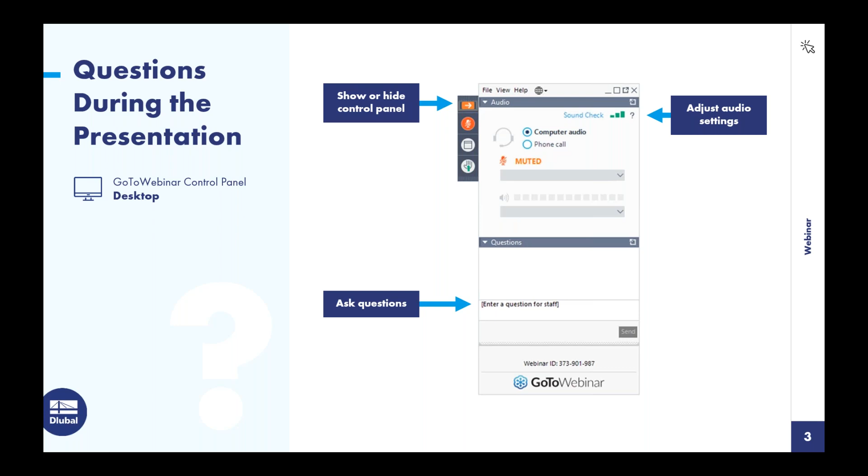We'll then move on to our second example, a CLT hybrid multi-story building. This is where we can address both lateral and gravity analysis and design. We'll take advantage of the building model add-on, which releases these building specific features within RFEM, including diaphragm and shear walls, and of course we can still carry out the full design of our CLT panels according to the CSA standard.

For those of you not familiar with our program, RFEM 6 is the base software, so this allows us to fully model our structure. All of the materials, the cross sections from the available standards are included in the base program, not only for Canada and the United States, but also other international standards. We can fully load the structure and get an analysis, so internal forces, deflections, and so on.

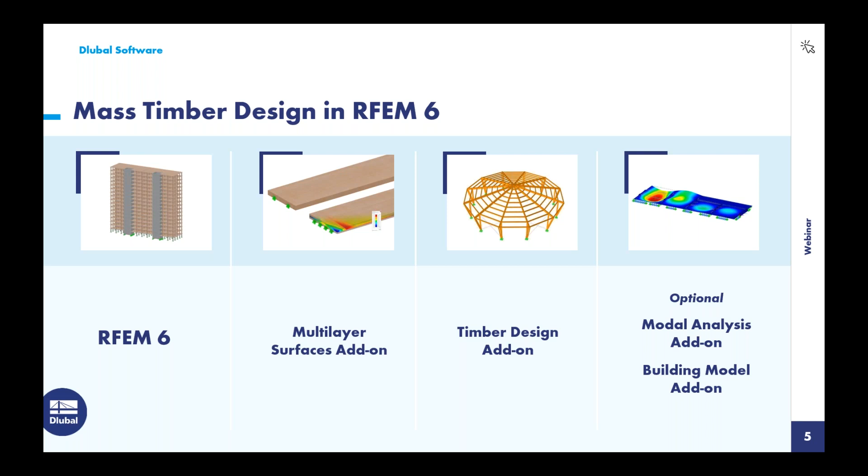We'll begin in RFEM today where, when you begin a new model, the base data dialog box is available to us, so we would give it a model name. For my timber floor, we could technically model this in a 2D environment since we're looking at gravity only, but I will keep this in a 3D environment. Under the second tab for the add-ons, these are the available add-ons within RFEM that you have purchased for your license, and for today's example, we're going to activate here the multi-layer surfaces as well as the timber design add-on.

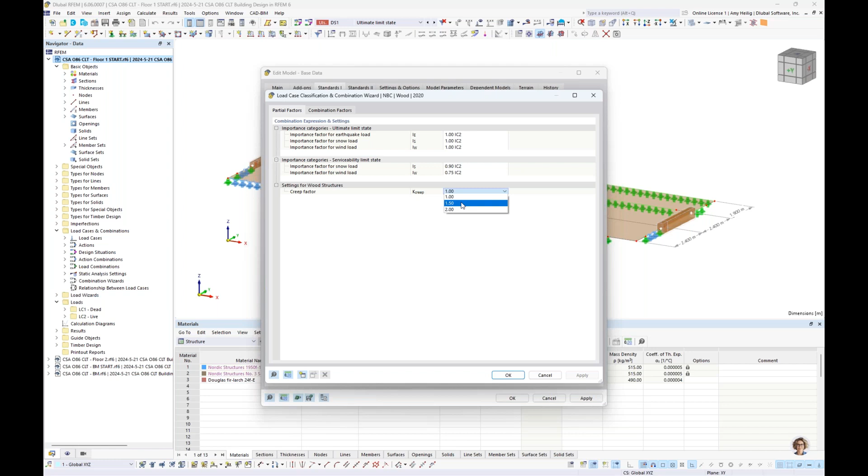Finally, under this third tab, this is where we set our standards. You'll notice within this dropdown I do have the NBC selected, specific to wood. This is identical to the NBC load combination generator above it. The difference is that when we activate the timber design add-on, we have the ability to account for the creep factor. I'll show this to you later on in the serviceability load combinations, how we can account for that, but the NBC wood is required when we activate the timber design add-on specifically.

We will carry out the design of the CLT panels according to the CSA O86 2019, but notice we also have the NDS, Eurocode, and other international standards available. I will be working in metric units today, but we can always change this to imperial units. If we access the unit settings here, we can toggle between metric or imperial.

I already have the timber floor modeled, but let us run through the workflow we would typically go through when modeling a new CLT panel. We would start by drawing a 2D surface element, available up here in our toolbar. The program is asking us to initially define a thickness.

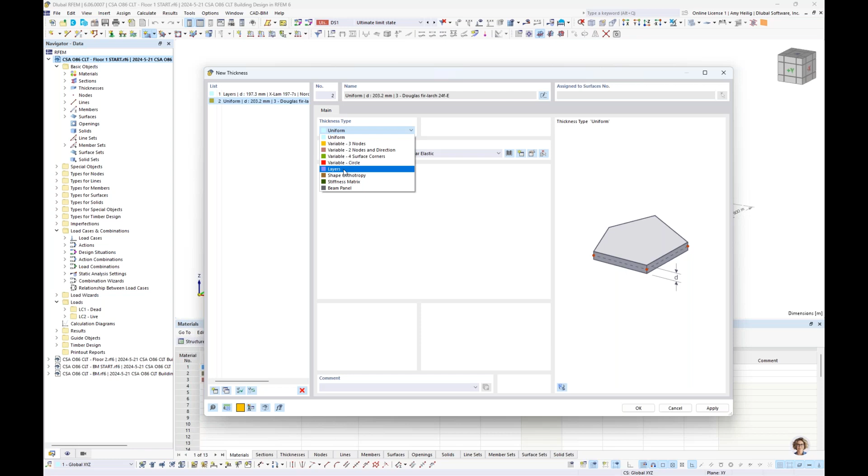If I go into my thickness definitions, we would create a new definition type here. Notice that the thickness type can be set to layers. This option is only available because we have activated the multi-layer surfaces add-on. Without this add-on active, we would not see this option available to us.

Under the second tab, this allows me to individually create my layers for my custom CLT layup. To begin, we want to define a new material. We can access our material database with the button in the upper right-hand corner, and using our filters on the left, we can filter to Canada, to timber, and then the CSA O86-19. Here are all of the relevant materials with the sub-materials shown on the right-hand side. Once we select any arbitrary material for our example today, we click OK.

It would be quite common for CLT to change the material model to orthotropic. This is required because we're using this material for 2D surfaces, so we need two different strengths in two different directions. We'll go ahead and toggle that to orthotropic linear elastic.

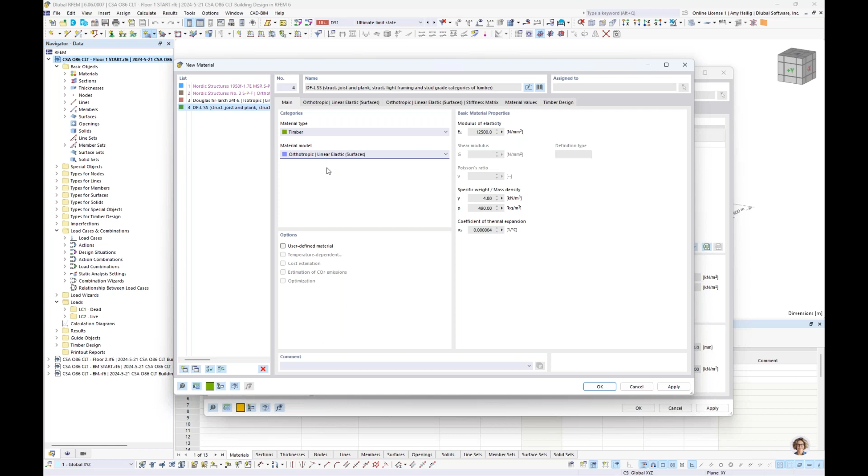We would also want to activate user-defined material. And it's quite common with CLT to set the modulus of elasticity in the weak axis direction to 0.

Once we have input this information for the material, it will be brought into the thickness dialog box where we can set the thickness of our first layer to something like 40 millimeters. The orientation is set to 0 degrees, based on the local x-axis of the surface element itself.

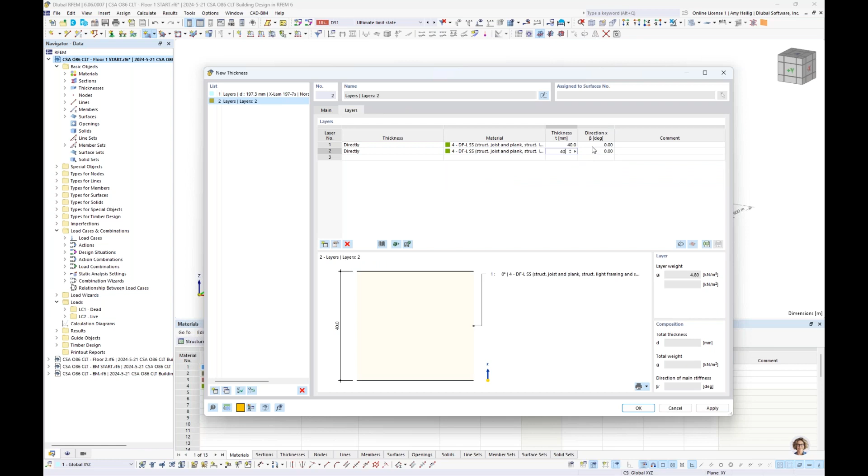For the second layer, we can choose this same material and set the same thickness, but the orientation would be set to 90 degrees. For our third layer, we'll again use the same material, 40 millimeters. And here we have a custom 3-layer CLT layup.

This is the entire concept of CLT: to ensure that these layers are oriented 90 degrees from the layer above or below it. We can save this to our library so that we can pull open this layup definition for any future RFEM models. Alternatively, if we want to take advantage of our manufacturer library, we can do so.

Under import layers from library, after clearing the filters of the regions, we have all of the manufacturers from North America and Europe implemented directly within RFEM. Filtering to the region of Canada, we have a few manufacturers here, including KLH, Kalesnikoff, and Nordic Structures. Today we'll take advantage of Nordic Structures and choose a 7-ply layup.

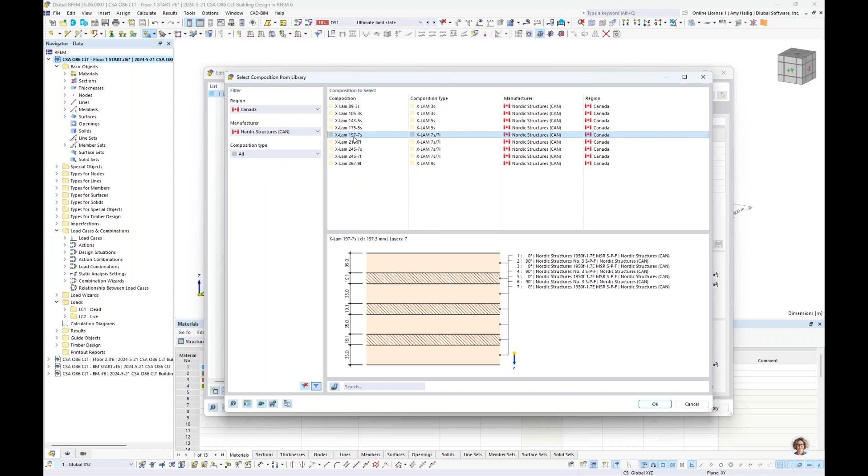When I click OK, you'll notice that all of these layers are automatically brought in with the relevant thickness and orientation, and this is just information given to us directly from the manufacturer. So quick access here if you do plan on using one of their products.

Under the third tab, stiffness reduction - this is a really important topic when it comes to our CLT panels. Notice that the K33 reduction factor here is for the torsional stiffness. We also have the K88, which is the in-plane stiffness reduction factor. These values were already given to us by the manufacturer.

It's quite common for most of these CLT manufacturers to not include glue at the narrow edges of the boards of each layer, so inevitably the shear stresses are also not going to be transferred to those narrow sides of the board. This is the reason why we typically would want to apply these reduction factors to our panel.

When we reference the CSA or the NDS, there really is no guidance on how to calculate these stiffness modification factors. So we actually refer to the EC5, and in particular the Austrian Annex, which has very clear equations on what these reduction factors should be when we do not have glue at the narrow edges.

I'll turn to our website, dlubal.com, where we have a frequently asked question, FAQ 4119, that discusses this topic further and exactly how to calculate the K33 and K88 reduction factor from the EC5 standard. We also have an Excel file you can directly download from the FAQ. If I pull open this Excel file, it's fairly straightforward—we just input some properties of our CLT panel, and the equations from the Austrian annex are already listed here to calculate exactly what those reduction factors will be.

So again, going back to RFEM, when you are taking advantage of manufacturer CLT products, these values have already been set and given to us from the manufacturer directly. But if you are creating a custom CLT layup, this is likely something that you're going to want to input yourself.

Now, K44 and K55 are the shear stiffness reduction factors. When we take a look at the CSA O86 or the Canadian CLT handbook for deflection calculations, these all utilize the shear analogy method to calculate the reduced bending and shear stiffness to account for shear deformation. RFEM is actually utilizing what we call the laminate theory, and it directly calculates the shear stiffness matrix entries D44 and D55, considering both shear and bending deformation. So the laminate theory is certainly a more detailed and exact approach compared to the analytical equations from the shear analogy method. That reduction is all taking place underneath the hood with the laminate theory calculations, so we likely are not going to adjust these factors.

Then we have our settings down here where we can activate this checkbox for design for failure of net section and failure in glued contact surface. So we might be wondering, well, what is this related to?

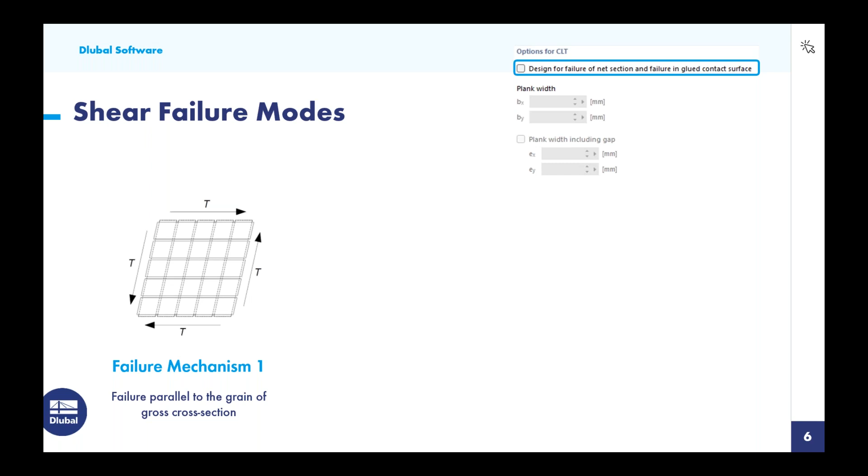Now, when we turn on this option, we're going to carry out 2 additional checks, including failure mechanism 2, which is failure perpendicular to the grain of the net cross section. This is also known in the handbook as the net shear failure.

And finally, we also have failure mechanism 3. This is the failure of orthogonally crossing boards, otherwise known as torsion.

So we might apply these additional shear checks when we have a CLT panel that's acting more like a beam, or certainly for wall elements. You'd want to refer to the handbook to decide if that's something you'd like to activate for those additional checks of the CLT panel.

The plank width would also be defined when we turn on this option, as well as a plank width including any gaps if those were available. This information would be needed to carry out these additional shear checks.

For today's example, I'm going to leave this unchecked, so we should only see failure mechanism 1 in our results.

The final tab here is going to be the stiffness matrix. This is the entire concept of these multi-layer surfaces—we are calculating this global stiffness matrix automatically for you based on the individual layers, and we can actually view the stiffness matrix here. I'll discuss this in more detail later on when we're running our calculation.

Once this information is input, we would draw our CLT panels. You'll notice that I've taken the liberty here to model 3 panels side by side for our timber floor. Now, it's really important, in the same way that we orient members with a strong and a weak axis, that we do the exact same thing for these timber panels. So CLT panels also have a strong and a weak axis, and we want to ensure we are modeling them correctly.

So under our navigator and the views tab, up at the top, we have our surfaces tree, where we can activate the display of the layer directions. I'll turn this into wireframe view and zoom in here. Now you'll notice that layers 1, 3, 5, and 7 for our CLT panel, which is the strong axis direction, are oriented in the lengthwise direction between supports, which is exactly what we'd like to see.

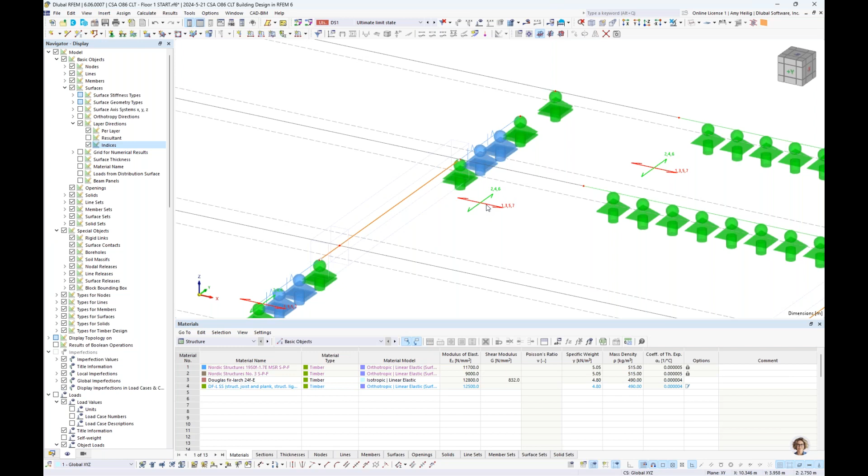And then those are the weak axis, so layers 2, 4, and 6 are oriented in this transverse direction. Alternatively, we can activate here only the resultant, which is going to show you the strong axis orientation only.

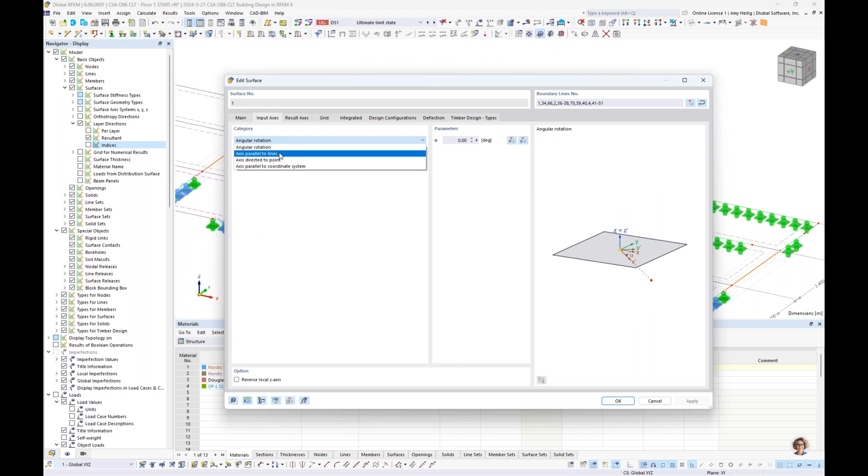If we needed to make modifications to the axis direction, we could double click on a surface or multiple surfaces, activate specific axes, and under the second tab, we have the ability to rotate the local axes or set them parallel to a line within the model, among other options.

So I'd also like to go over the additional elements that are modeled here for my timber floor. You'll notice that we do have glulam beams that are going to span between these supports and support the CLT panels above them.

Now, I did not model an eccentricity here. Everything is modeled at the center line. This is a bit more conservative approach with the internal forces rather than modeling this fully rigid eccentricity, which may be hard to achieve in true construction methods anyway.

So taking a look at the cross-section definitions quickly, we have our first beam over here, a slightly larger section at 240 by 440 millimeters, and then the rest of the beams are going to be 160 by 320 millimeters.

All of these members have a moment release applied at the member ends, as well as a torsional release applied at one end only. Now, these were modeled as separate segments here. It is entirely possible to keep it as one continuous member, but if they are separate segments, it's really no problem in the program. We can select both of these and create what we call a member set.

So that's what this very faint dotted line is around both of these segments. And member sets can be fully designed as one continuous member as well, regardless if the beam is broken up into separate segments. Now, we won't be looking at the member design today, rather our focus is only on the CLT design, but I thought that was worth mentioning.

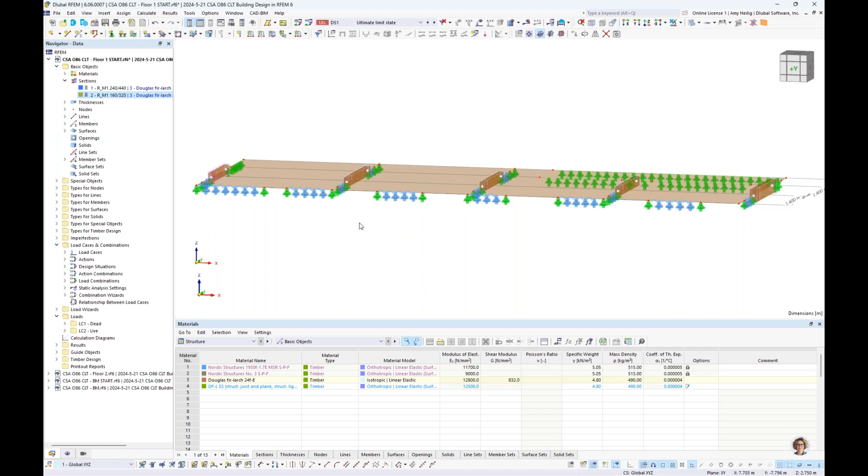You'll also see here several support conditions, and essentially this is a timber floor that is modeled at the elevation 2.75 meters in the vertical direction. So these support conditions are going to represent the columns and the wall elements that are framing up underneath it. But because we're only evaluating and analyzing the specific floor for gravity only, we're representing those by the support conditions shown.

So for example, we have pin supports here and over on the right that maybe represent the column framing up into the timber floor directly for point supported CLT. Then we also have the pin line supports that are going to represent our concrete shear walls. And then you'll also notice these nonlinear line supports, which are representing our CLT shear walls that maybe exist framing up into this timber floor.

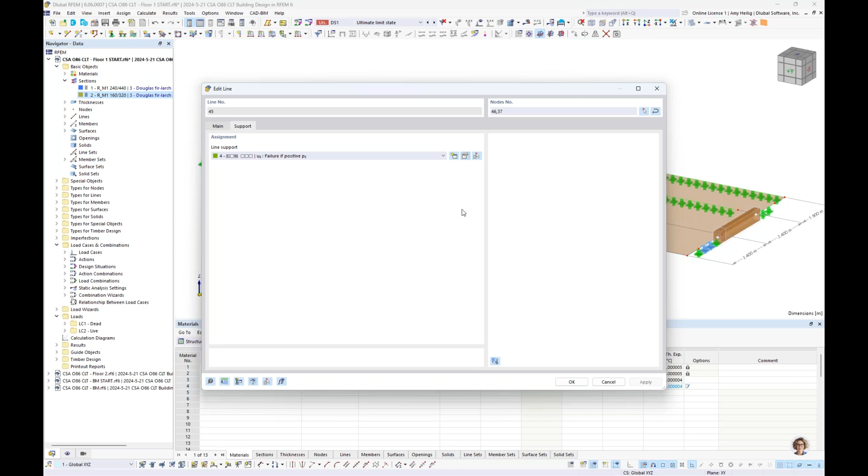So I have set this nonlinearity here so that these two elements will release in tension. When that occurs, we also have the nodal supports modeled at each end of that CLT shear wall. This represents some type of tie or strap to take those tension forces over.

So the modeling overview is complete, but now let us talk about how everything is connecting together. And specifically, we'll start with the timber panel to panel connection here. So as it's shown as default, all of the member forces, the CLT panel forces and moments, are going to be fully transferred to one another.

But we know that these panels will likely be connected with screws. So we would like to release something like the moment. Maybe we want to account for the slip of the screw connection. Well, we do so with what's called a line hinge.

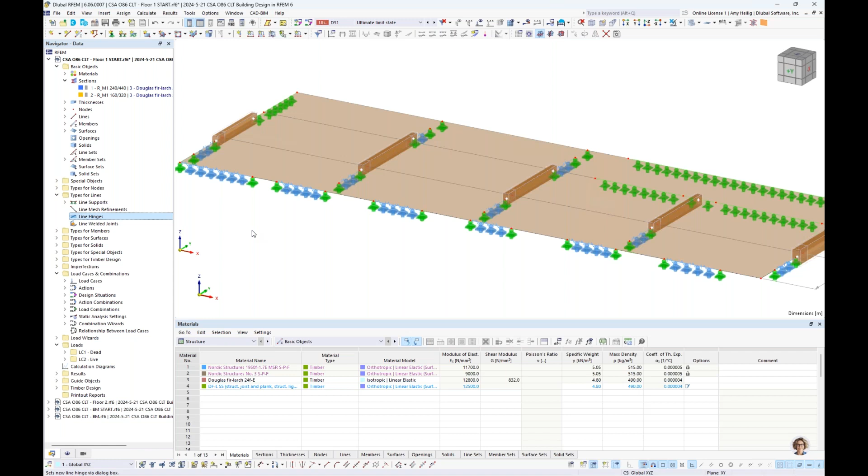And this is available over here in our navigator. Under the Types for Line folder, we can right-click here under Line Hinge to create a new definition type. And within this dialog box, we can fully release the moment between the two panels.

Now, for my example today, I'm actually going to just set this to a very small value. I get a little bit better stability once we get into the larger 3D model. So it's entirely possible to release it for most scenarios, but in others, you may need to just set a very small spring constant here.

We also can define the slip of the connection, and this is based on the local axes of the line element itself. So in this longitudinal direction, the local x-axis, we can define a spring constant here, and this would be calculated outside of RFEM just depending on the type of screw connection we have.

Using an arbitrary value here of 8,000 kilonewtons per meter squared, we can set this in both the transverse direction and also the longitudinal direction. We see both the X and Y axes indicated here in our image, and that's what we're setting for this slip over here on the left-hand side.

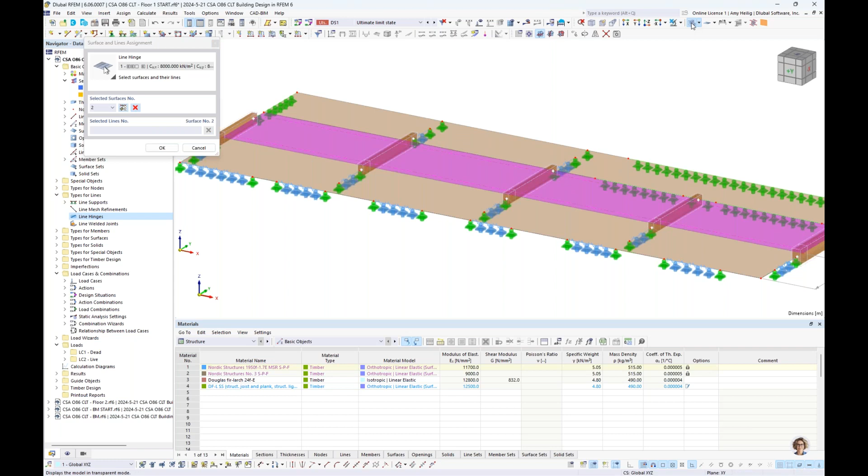Once we have defined this specific definition type, we need to actually apply it to the model. We can do so by initially clicking on our surface, and then my second click is going to be the line elements themselves that I want to apply this line hinge to. When I complete the first surface, we'll choose the option to add a new object where we select surface number 2, and I'll turn this to wireframe view. My second click will be these line elements on the right-hand side of surface number 2 to apply the line hinge. Once this is done, I click OK through these dialog boxes.

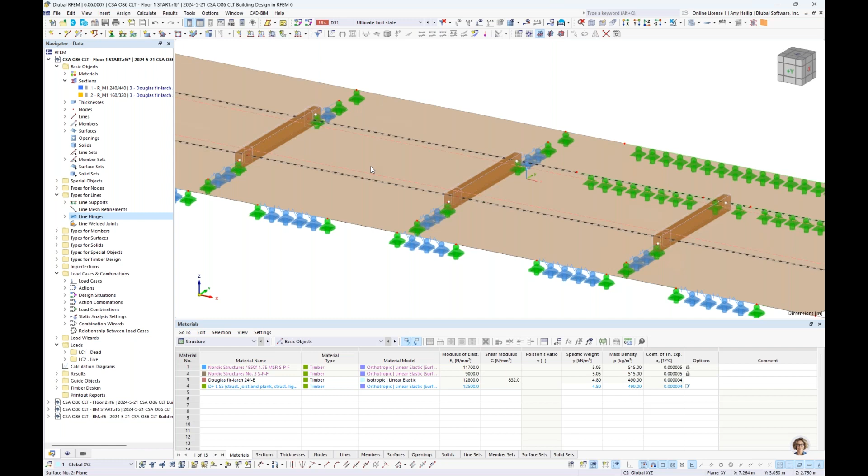If I turn this into a rendered view we should see the line hinge symbol. You'll also notice that I applied this to only one side of the CLT panel. We do not apply a line hinge to both sides — this can cause instability issues within the model itself. We need to leave at least one CLT panel fully fixed. This is the same concept for 3 CLT panels framing into the same line: we can release 2 of them, but we need to leave at least one as fully fixed.

Now we have this same topic of conversation for how the timber members are connected to the CLT panel. Currently, everything is rigidly connected, but we want to account for likely this screw connection. So instead of a line hinge, we're going to apply what we call a line release, available under the special objects tree — we see here line releases. So panel-to-panel connections use line hinges; panel-to-member connections use line releases.

We create a new definition type, and to begin, we select here the degree of freedom definition. This should look very similar to line hinges in that we can release the moment or set a very small spring constant. We can also account for the slip here between the member and the CLT panel. This may be a different value, such as 5,000 kilonewtons per meter squared, depending on our connection, and perhaps I only want to apply the slip in the longitudinal direction here along the line length.

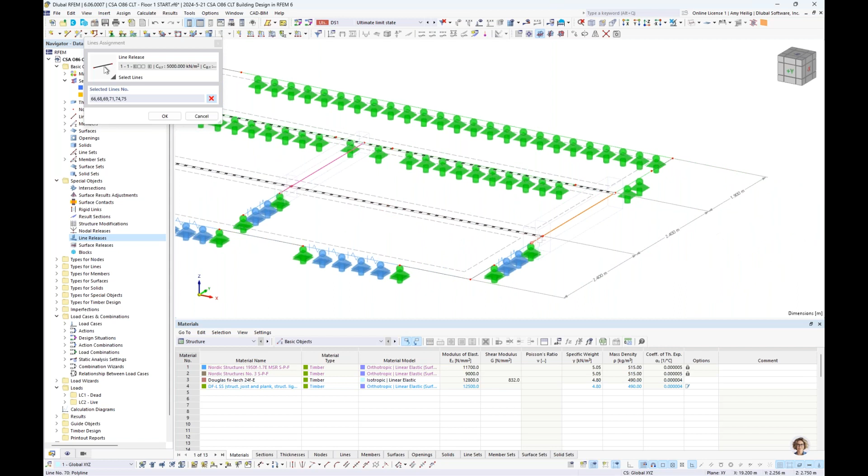When I click OK, I'd like to select here my first 2 surfaces because I would like to release my beams from those initial 2 surfaces. Then I can graphically select my line elements, so I'll scroll in here to select the lines of my first beam. I'm going to purposely skip my second beam, and I'll go ahead and apply this to the additional beam line elements shown in the rest of the model. Once this is complete, we click OK.

The program says, hey, wait a minute — in order to correctly apply this line release, we need to apply either action 1 or action 2. We'll go ahead and apply action 1, and then we get the line release symbol shown around those members.

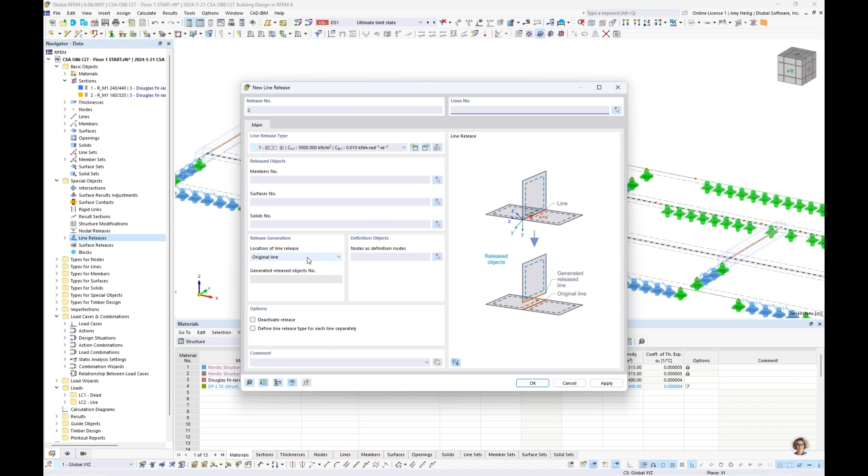Now for this second beam, we're going to right click to create a new line release again, but this time we're going to release surfaces 1 through 3. We're using the same definition type, and then I can graphically select these 3 lines. You'll notice this is different because this beam spans across all 3 CLT panels, whereas the other beams only span across surfaces 1 and 2. So our line releases are now complete.

I did want to point out a new feature here under rigid links that can also take the place of this line release. We've recently added the ability to add in a rigid link for a line-to-line connection, something similar to a beam to CLT panel. You'll notice that the line hinge definition type is already available within this dropdown, so this is an alternate method. If you prefer this over the line release, you can go ahead and take a look at that new feature as well.

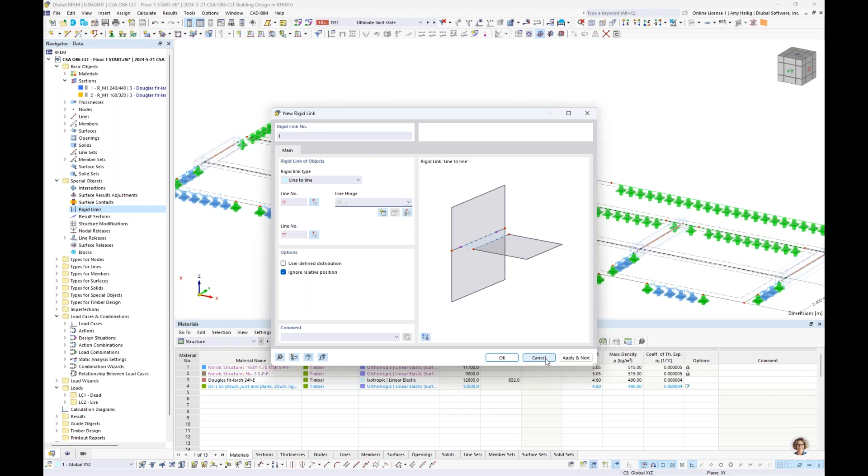All right, so now the modeling is complete. Let us review our loading. For this example, we have a very simple loading scenario — gravity loads only. We have here our dead load, which includes self-weight only, no additional loads applied. We also have a live load of 2 kilonewtons per meter squared, just basic surface loads applied to the 3 CLT panels. In reality, of course, we would have much more complex loading and many more load cases, but for today this will be sufficient.

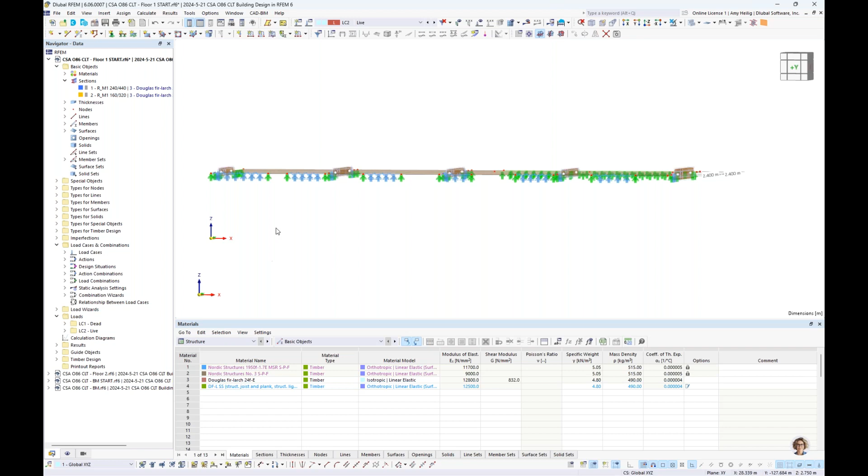Now, for these two load cases and for this model in general, remember we're at an elevation of 2.75 meters in the vertical direction. We're going to assume that this is part of a multi-level story structure, so we likely have additional stories above it that we need to take into consideration, all of the loads being transferred down through these additional floors to the current floor that I'm designing, because the loads I have applied now certainly do not do that.

I would like to take advantage of a feature under our load wizard that allows us to import the support reactions and convert them to loads within our current model.

So if I pull open a second model here, this is an identical timber floor. The only difference is that I have increased the height of it an additional 2.75 meters to represent the floor that's above this one we're currently designing. Same loads are applied, the dead load and the live load.

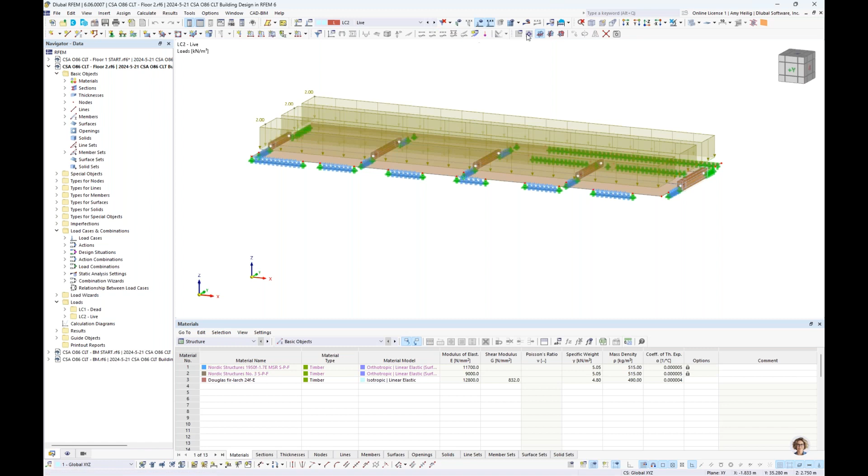Once we run the calculation, what we would see here are support reactions, at the nodal supports and also along all of these line supports. So this is the information for both the dead and live load cases that I would like to transfer into my current model and convert them to loads.

So going back under our current model, we can activate under the load wizards the import support reactions option. This option will only be available under a couple conditions. Number one, that additional model I just opened — we need to run the calculation and save the results to our computer. That is required.

Number two, the current model as well as the model we're bringing the support reactions in from must both exist under the same folder, the same project folder within the Dlubal Center. So we just want to make sure those are within the same folder together.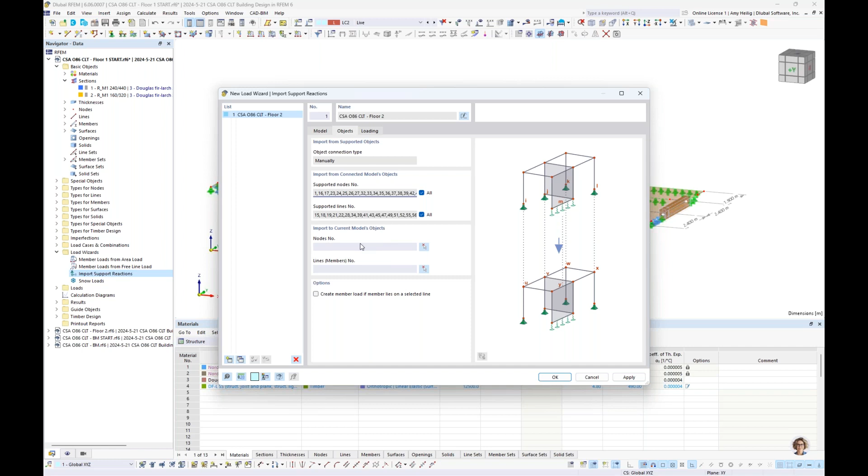So we want to bring in the reactions from the model I just showed you, and the program has already detected the support reactions from the additional model. In order to bring in those reactions, we need to tell the program where exactly to place them on our current model. We want to select all of the nodes that those support reactions should be applied to as loads.

This is actually quite easy to do if I select my options under the project navigator. I can turn on, within the graphical visibility, only the nodes that have a support applied, so everything else is hidden in the background. This way I can go ahead and highlight all of my nodes. We'll make sure we've selected all of them — you'll see them highlighted here in pink, as well as the node numbers given to us in this dialog box.

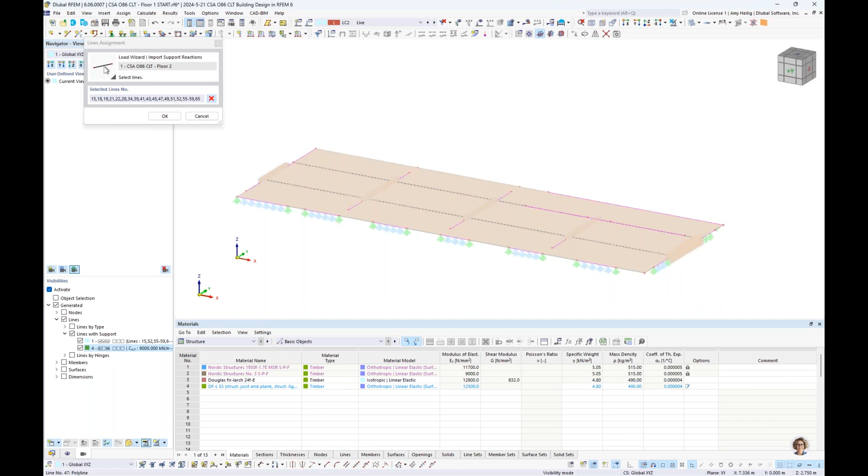Now we want to do the exact same thing with our line elements that currently are supported here. I'll graphically select this, turn off our nodes, and instead activate the lines that currently have a support applied to them, whether linear or nonlinear. We select all of these line elements, and you'll notice everything is highlighted here in pink.

So basically we need a one-to-one ratio of how to bring in those reactions and which nodes and lines to apply them as loads within our current model.

Under the third tab here, we can tell the program whether we want these line loads to be uniform, smoothed out, or varying. We'll go ahead and leave these as varying.

So we're going to take the loads from load case number 1 of the model I just showed you, the separate model, in the global Z vertical direction, and transfer them to load case 1 in the current model — dead load to dead load. We also want to transfer the live load from the additional model in the global Z direction to the live load in my current model.

Once all this information is set, we can click OK, and we get an arbitrary view here of the loading. I'll go ahead and turn off the surface loads so that we can see this. When we run a quick calculation, all of these reactions will be brought in here in the background. If I drag this down, we see this generated here. So we'll let this move through the quick calculation of the live load only.

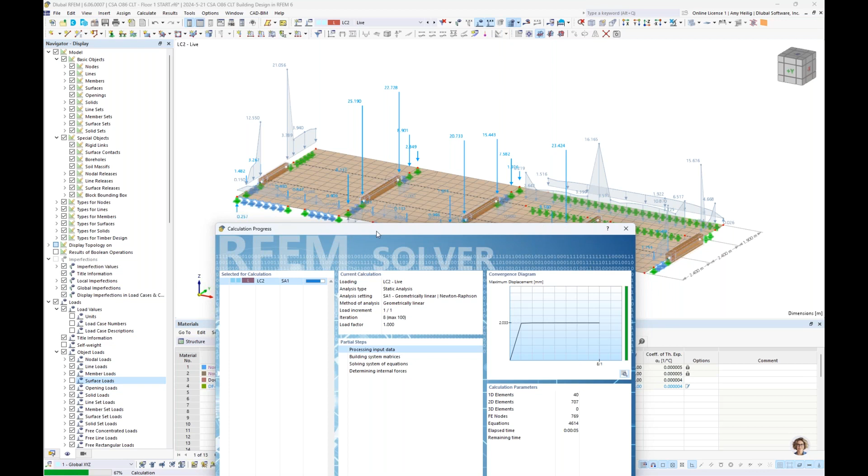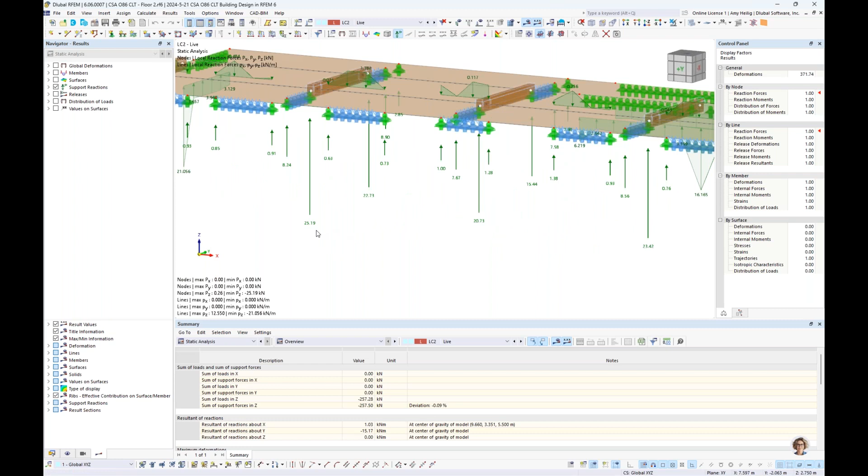Before we go through our results, let's compare these reactions to the forces. Here we have downward forces from the model above it, around 25 and 22 kilonewtons for these two nodal loads. If we jump back to our previous model, floor number 2, sitting above it, and take a look at the live load, sure enough, here are those reaction forces around 25 and 22 kilonewtons.

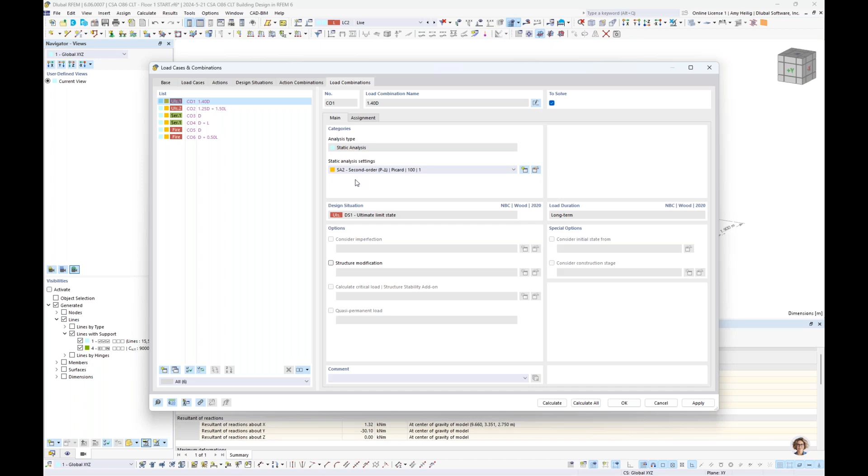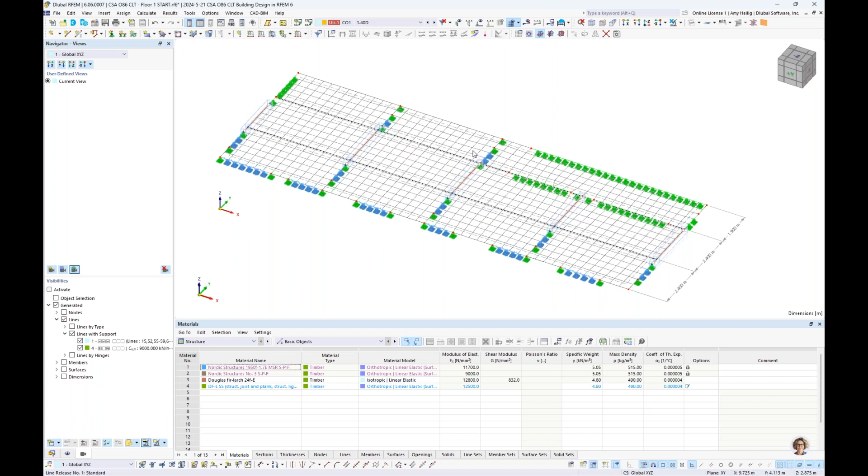Before we run the analysis portion, maybe one more thing we would want to check is under calculate mesh settings: we can adjust our global mesh here to something slightly more refined, such as 0.4. We can regenerate the mesh and take a look at it. Keep in mind that mesh refinements are possible for any of these lines or nodes or individual surfaces as well, but everything will be meshed automatically according to the global mesh otherwise.

So we can technically carry out the analysis, but the big advantage of RFEM 6 is to work through both the analysis and the design as one continuous workflow.

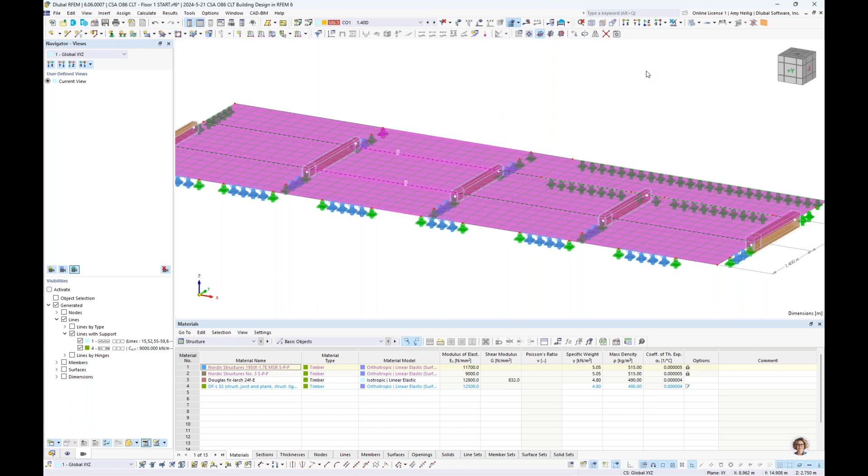I'd like to talk about the design input here specific to the CSA standard for our CLT panels. If we double click on these three different panels, you'll notice the design properties is automatically activated down here. This is telling the program that not only do we want to carry out the analysis with these CLT panels, but we'd like to also carry out the design according to the CSA within the timber design add-on. If we uncheck this, we see multiple tabs disappear, telling the program that we don't plan to carry out the design.

Looking at the design configuration, under the ultimate configuration we have a default setting here, and we'll jump immediately to our surfaces. You can see we have a new conservatism factor added here within RFEM 6 specific to the CSA. When we refer to either the Canadian CLT handbook or the CSA O86, there is a strength modification factor set at 0.85, and this should be applied in the bending strength strong axis direction. Again, something we didn't have in RFEM 5 that is now included here within RFEM 6.

Taking a look at the serviceability configuration, again for our surfaces, this is where we set the limiting deflection ratios for either surfaces that are supported at both ends or if we have a cantilever CLT panel.

And finally, our new fire resistance configuration. If we go into the detail settings for this, notice we can carry out fire design for members, but focusing here on surfaces, we would want to input the required time of fire resistance. So using our drop down, maybe we modify this to 45 minutes.

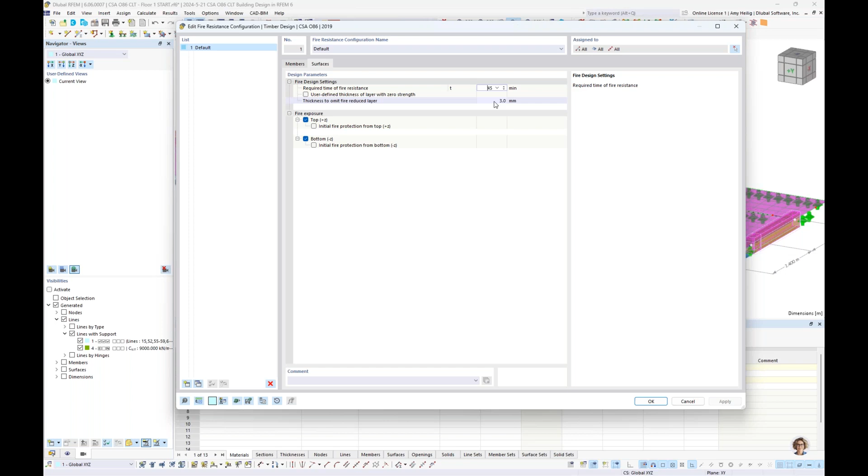Now you'll see here a value of 3 millimeters. So if the fire causes the CLT layer to be reduced to anything less than 3 millimeters, it's completely omitted from the calculation. We can also override this. So if the fire does char completely any of these layers, the true cross-section reduction and reduced stiffness is going to be used within the analysis.

It's really important to understand that we're not going to use the same internal forces from the ultimate or serviceability configurations, but rather we will determine which layers are fully charred or partially charred, rerun the calculation with this new stiffness. So really powerful what we are doing with the fire design.

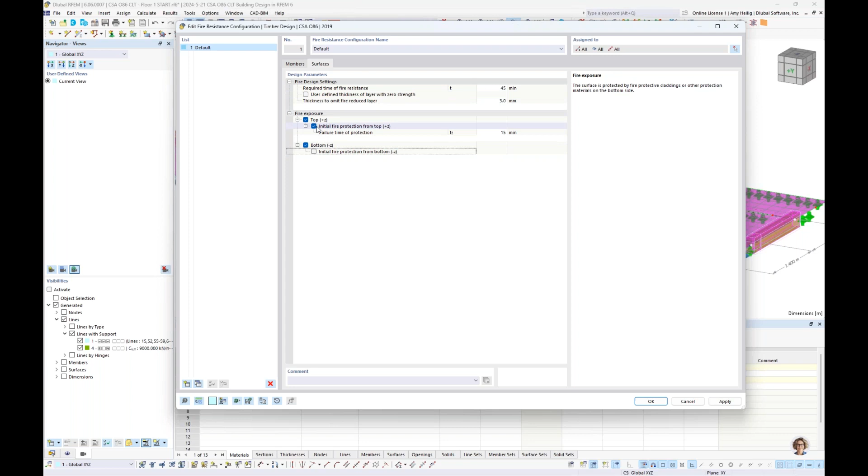If we have any fire protection at the top or bottom of the surface, we could activate that here within the configurations as well. Under the deflection tab, is this panel supported at both ends, or is it a cantilever?

And then also for our reference length, what do we want to use for our length with those limiting deflection ratios? We can use the maximum boundary line of the surface, the minimum boundary line, or we can manually set this. So in my case today, maybe I want to take advantage of my measure tool, where I can simply measure the distance between my nodal supports, for example. So 4.8 meters. I'd like to use that for my deflection criteria rather than maybe the full length of the panel, as that would be very conservative.

And finally, we have our timber design types here, the service conditions. We do have a default setting here. So for our panels, as well as our members, if we were designing them, are they dry? Are they wet? Are they treated? This all just affects the adjustment factors as well as the capacities or the strengths of our elements.

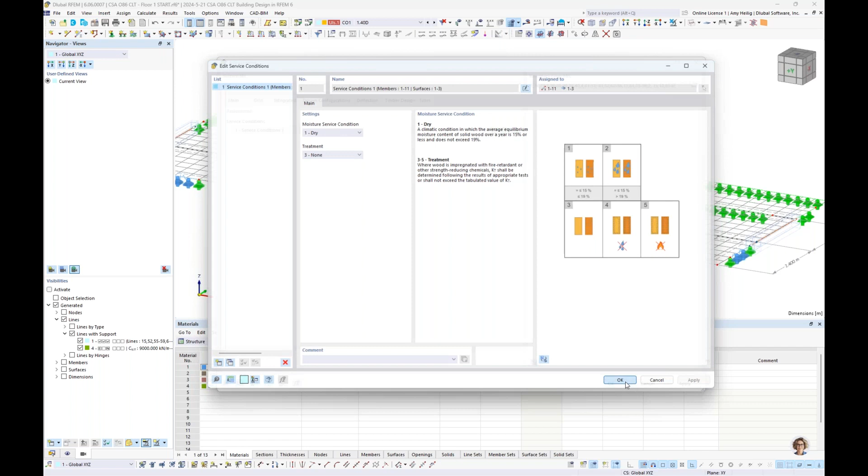So now that the configurations have been applied to this structure, we'll go ahead and turn off our mesh here and turn this back into a rendered view.

Under the timber design add-on within the table, this is our input data. So we'll see here again those three design situations, ultimate, serviceability, and fire, that we just simply need to tell the program which limit state checks to apply according to the CSA standard.

So ultimate to ultimate limit state, serviceability, I'm going to toggle this down here in my drop down to the total load to check my deflections, and of course our fire design situation will be set to the limit state of fire.

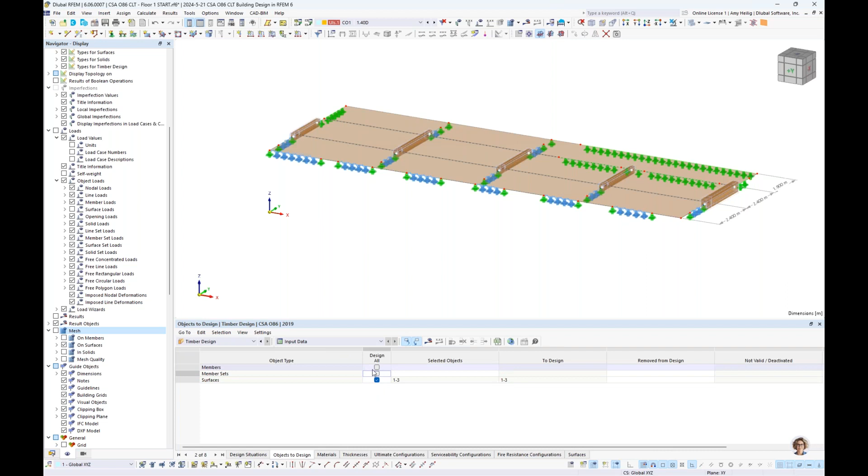Under the objects to design, currently everything's selected. We're not going to design our members here, but we will go ahead and design these two surfaces. So we're now ready to carry out the calculation.

Now this does solve quite quickly, but it's worthwhile here to jump back to the PowerPoint just to explain in a bit more detail what this multi-layer surfaces add-on is doing specific to CLT design.

So if you remember when we created our CLT layup, we had input each individual layer, and this is true even for the CLT manufacturers that are brought in, and each individual layer has its own stiffness properties, modulus of elasticity, shear modulus, and therefore each layer has its own stiffness matrix.

So utilizing this add-on and the laminate theory, the program is actually going to calculate the overall stiffness matrix of the panel for us. So this is the really powerful part of RFEM, is that you as a user aren't having to go in here and manually determine what the stiffness matrix is for each panel, but we're going to do this for you.

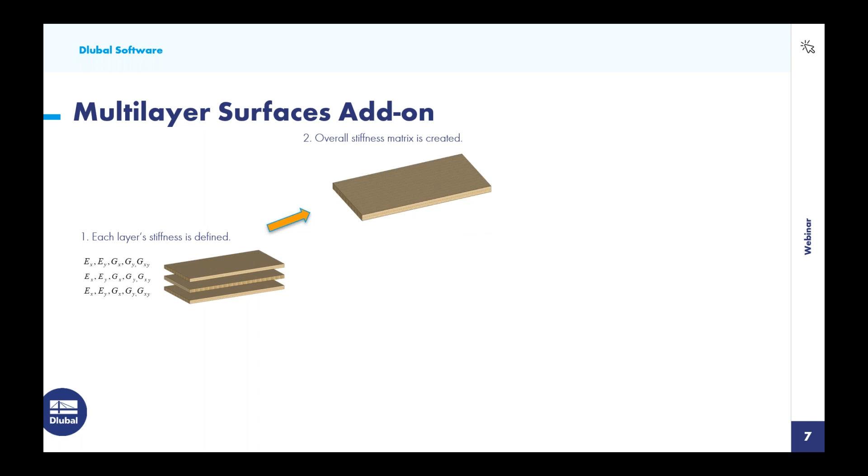And again, through the laminate theory, here's a sample calculation for the D11 entry, considering all of the individual layers. Once this is determined, we export this back out to RFEM, we apply the loads, we run the calculation, and for each one of these surfaces, we're going to get internal forces.

And from these internal forces within the surfaces, through a series of equations, we're going to determine the stresses. And we're further going to take those stresses and distribute them back to each individual layer of our CLT panel. So when we look at something like a 5-ply layup, we might see the stress distribution looks something similar to this.

And these stresses are what we are going to compare to the CSA design equations to ultimately get a design ratio on the CLT panel.

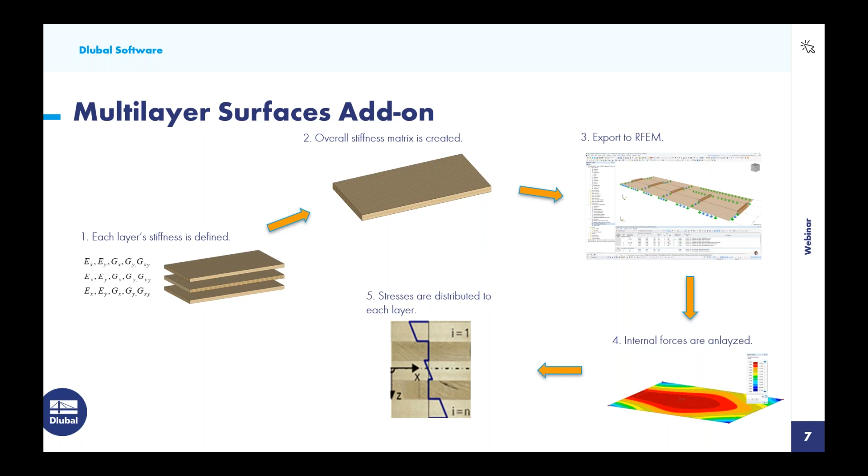So going back to RFEM here, our calculation should be finished, and you'll notice that we are seeing our design results here in the timber design add-on. We can view the design ratios for each surface.

Looking at surface number 1 that's closest to us, we see a series of design checks for ultimate limit state, fire design, as well as serviceability. So sure enough, if you remember back to the PowerPoint, we see that shear check failure mechanism 1 here.

Another common question is, do we check rolling shear? Yes, we do check rolling shear, and in our case today, this is actually the controlling design ratio. This would be shear in the YZ plane.

So we can activate what we call the design check details, that is going to show us line by line exactly how this design ratio for rolling shear was calculated. We can see over on the left all of the adjustment factors that were considered and the values along with code references. The other helpful advantage here is called the diagram in surface point.

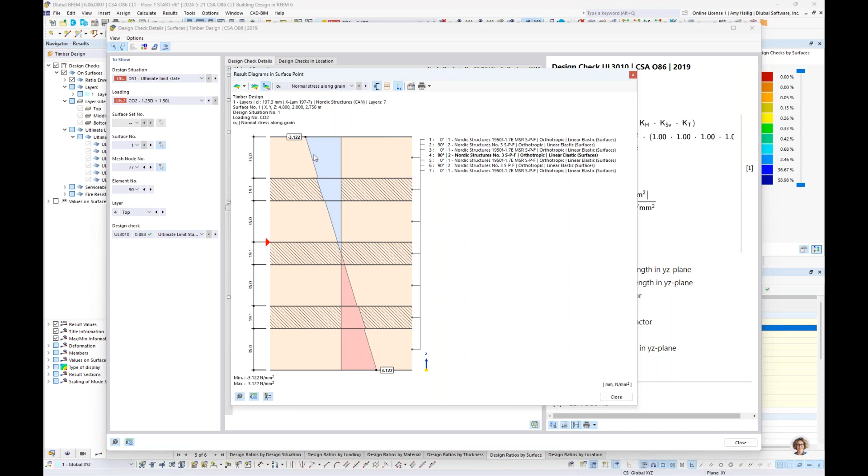Currently this is a cross-section view of the design ratio of the 7-ply layup, but we can use our drop down to check the stresses as well. So if we're interested again in those rolling shear stresses, as we would expect, we see those highest stresses here in these center layers. We can also take a look at the normal stresses or the bending stresses here and see how they look, again referencing the cross-section of our 7-ply layup.

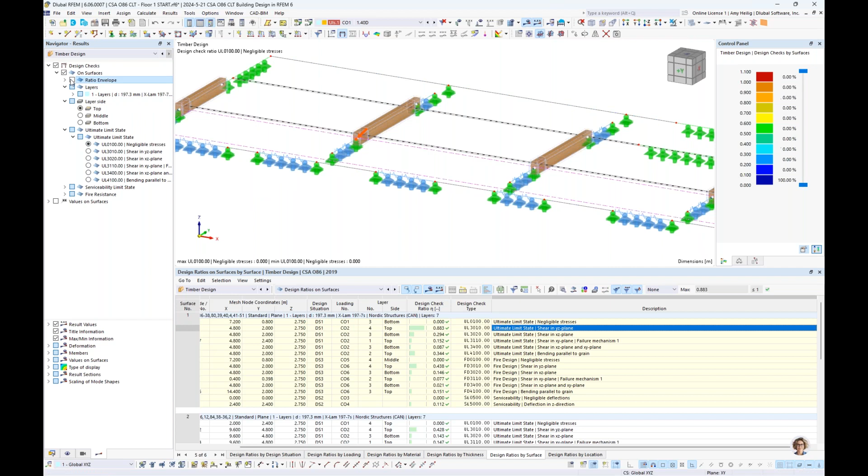So once we have taken a look at the rolling shear in table format, design check details, everything's available graphically here as well. So currently we're looking at a ratio envelope of all design checks, but we can activate the rolling shear check 3010, keeping in mind too that we need to specify the relevant layer that we're looking at. So we're most interested in rolling shear in layer number 4. If we activate that, then we're going to see our results shown graphically here.

Moving on to fire design, and also keeping in line with those rolling shear checks, we can take a look at the design check details here. So really the same concept, but something really important to note here is the charring depth.

So we can actually see which layers are completely omitted because they are fully charred from the fire conditions that we have set. We can also see which layers, in this case layers number 2 and number 6, that are going to be reduced due to the fire. So once we determine this information, again, we've lost layers number 1 and 7, and then 2 and 6 are reduced.

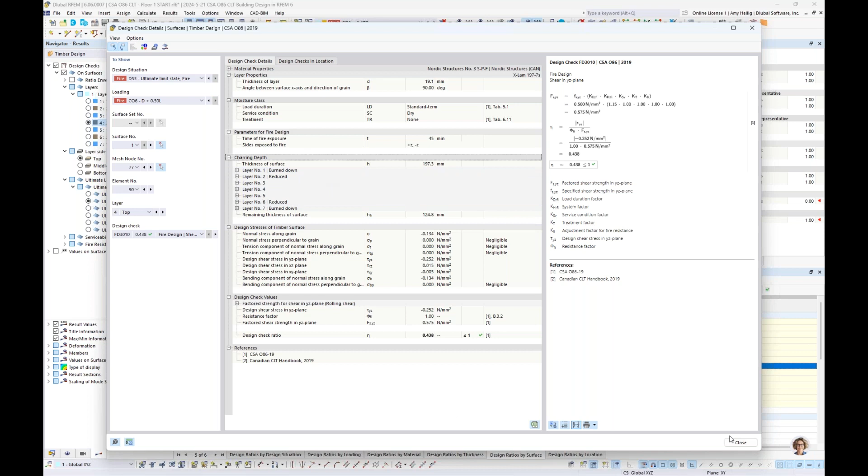We are going to export out that stiffness back to RFEM with the reduced cross-section dimensions as well, and we rerun the calculation to get the new internal forces with that reduced cross-section. So again, something that's really powerful going on here with those fire design checks.

So now that we have covered the basic timber design, let us back up also to the analysis. If we drop down to one of these load combinations here, and under my navigator, I can actually toggle back to the static analysis. So currently we're looking at the global deformation here of our CLT panels under these gravity loads.

But we can also access the surface results. And maybe we're interested here in viewing the stresses, and we'll take a look at the normal stresses in the positive direction here. So we want to also align the stresses with which layer we're viewing of the CLT panel.

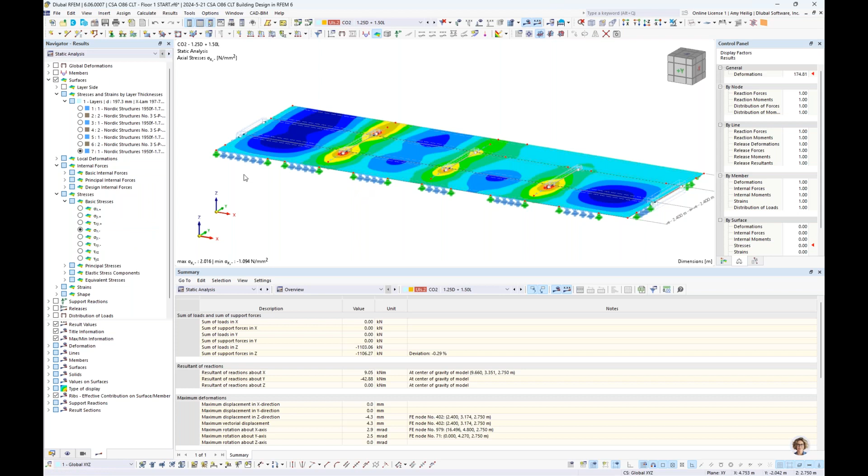So we also see that option here within our navigator. For positive stresses, we probably want to activate layer number 1. When we activate the negative normal stresses, we likely want to activate layer number 7. When we're taking a look at shear stresses, we probably want to activate one of those internal layers, such as layer number 4. So you can see how these stresses go hand in hand with the relevant layers that we can toggle back and forth between.

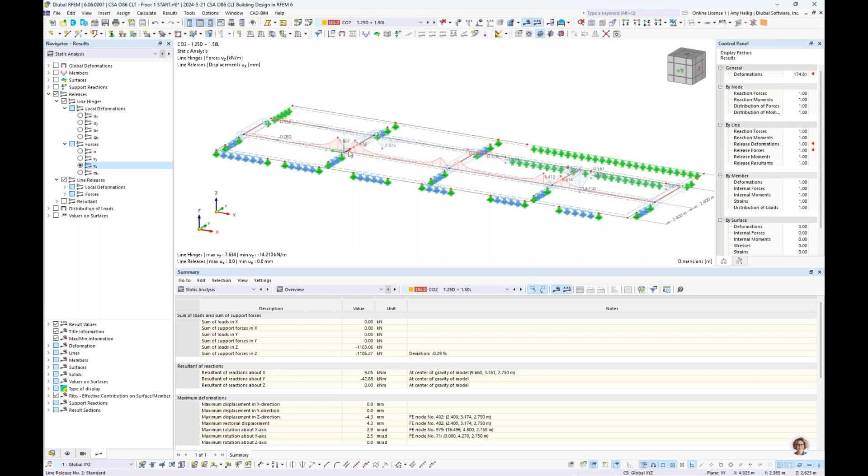The final thing to mention here that relates to the analysis is the releases option. So if you remember, we have these line hinges and these line releases. It's possible to view the internal forces of these elements as well. So for example, our line hinges, our panel-to-panel connections, we only have gravity loads in this case, so we can view the shear forces in the vertical direction between these two panels.

So we're currently viewing them graphically, but we can also right-click on the line hinge itself to view what we call the results diagram. I'll empty out all of these diagrams and scroll all the way to the bottom where we can activate that same information I was just viewing graphically. This would probably be the forces we'd want to design our connection to. So it's nice that this is available both graphically as well as in that result diagram.

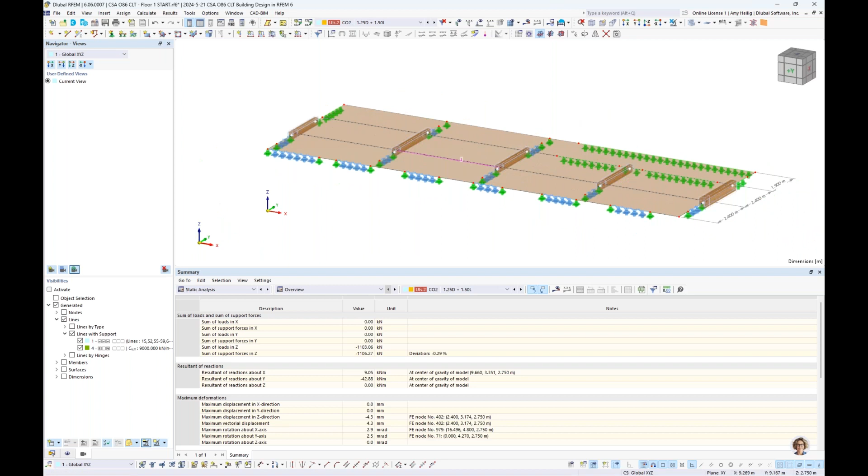The other quick thing I want to mention is a general modal analysis. I'll go through this rather quickly, but we have additional webinars like the NBC response spectrum analysis that go into much more detail on something like the modal analysis. But point being, I just want to show you today how to quickly run this to determine the natural frequencies.

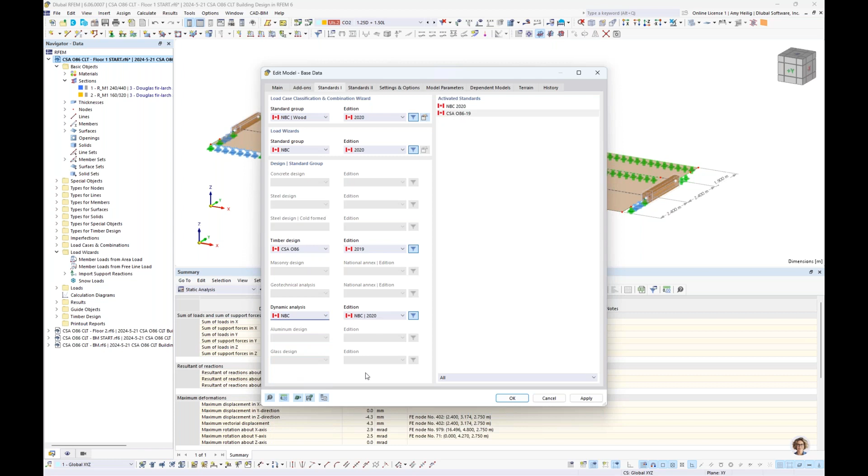Of this timber floor. So if we go back to the base data, this is the same dialog box we had at the beginning of this example. We can activate here the modal analysis add-on. Under these standards, we'd want to select the NBC 2020. We click OK, and now under our load cases and combinations, I'm going to create a third load case.

That's going to be our modal analysis, where the analysis type modal is selected. I do want to import the masses for the modal analysis, considering both dead and live load. In order to do this, we need to create what's called a mass combination. The program can automatically do this for us if we create a new design situation for effective seismic weight.

We're not going to use this in the timber design add-on, but what this allows me to do now is automatically create this mass combination under the load combinations, considering both dead and live load. So now, going back to my modal analysis load case 3, I can import the masses from this mass combination.

Under the modal analysis settings, I'm really not interested in anything in the X and Y direction. I really just want to look at the mass matrix in the global Z direction, or the vertical direction. And we can quickly run this eigenvalue analysis to take a look at the first 4 mode shapes of our timber floor.

So once this is done solving, we'll see our first 4 mode shapes that we've solved for presented to us, as well as the natural frequency. For mode shape 1, we have a natural frequency of 11.4, mode shape 2, 12.1, and so on. These values are likely what we're going to use to determine if we need to look at additional vibration design, maybe outside of RFEM. But the modal analysis will certainly give us this information to begin with, including the natural frequency for each of the mode shapes.

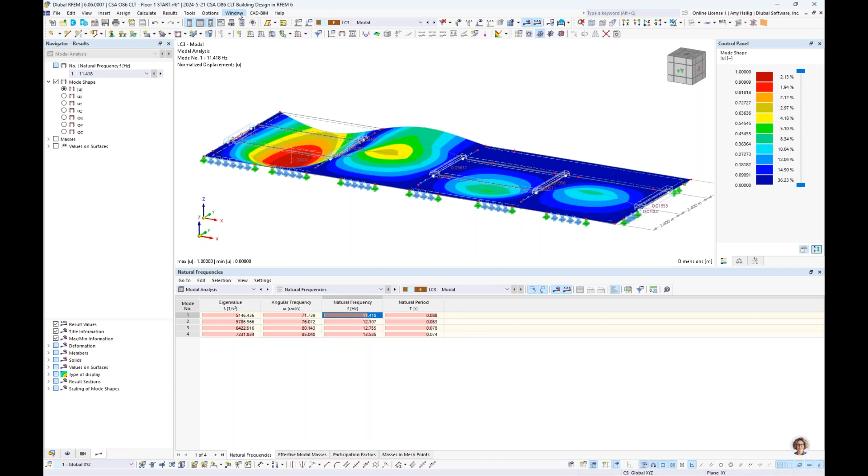Okay, so now that we've taken a look at this gravity-only timber floor, we're going to move on to our second example today. This is going to be a multi-level story structure, and it might look a little overwhelming at first. But if we take a look at a single floor element here, create a visibility, and zoom in, you'll notice that this is the exact same timber floor that we just designed.

The only difference is that rather than modeling all of our nodal supports and line supports, I've actually modeled in the true CLT shear walls. We also have concrete shear walls and columns framing into each one of these timber floors. So again, this is definitely related to the previous example that we just fully worked through.

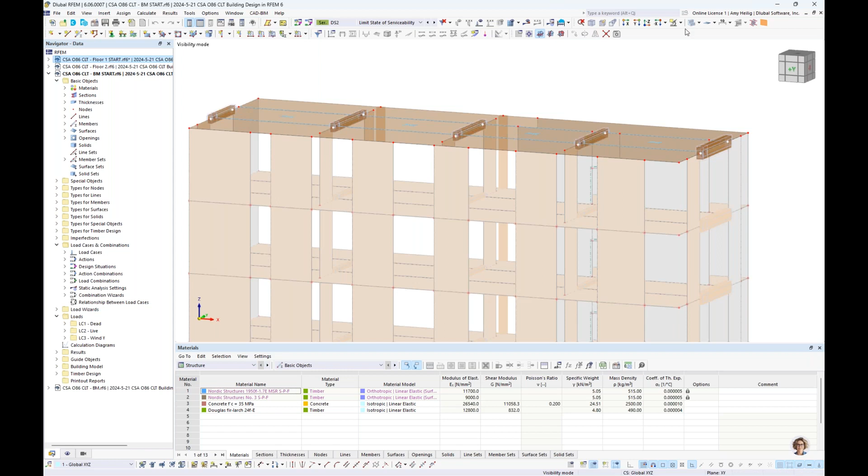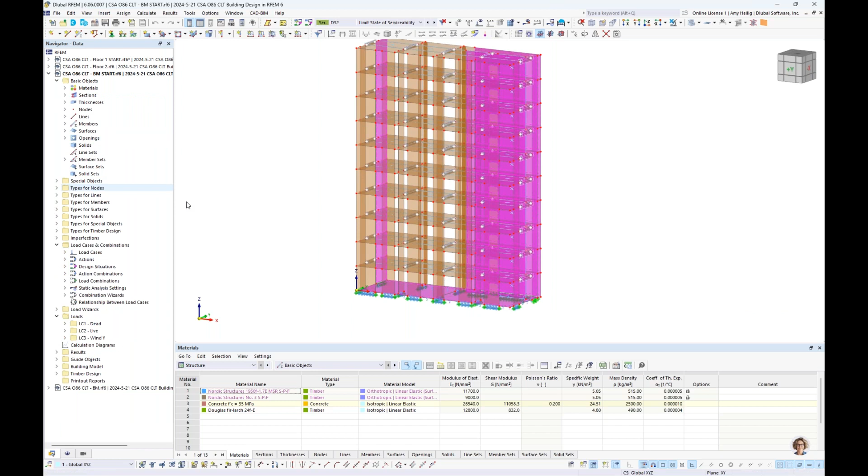Just to explain this a little further, you'll notice this is a hybrid structure, as I mentioned, because we do have additional concrete shear walls. If I activate here just to show you the concrete material, we see these concrete shear walls, concrete core modeled, as well as our foundation slab down here at the bottom. So it's possible to fully design these hybrid structures, whether it's steel, concrete, or CLT, all within one program in RFEM according to the Canadian or US standards.

What else you will notice is that my lateral loads have also been applied. So we have the same dead and live load that we saw from the previous example, but we now also have a wind load applied. And this is just a simple line load, as you can see here, applied at each story level. So pretty simplistic load application for today, but again, we just want to account for that lateral load applied to the entire structure.

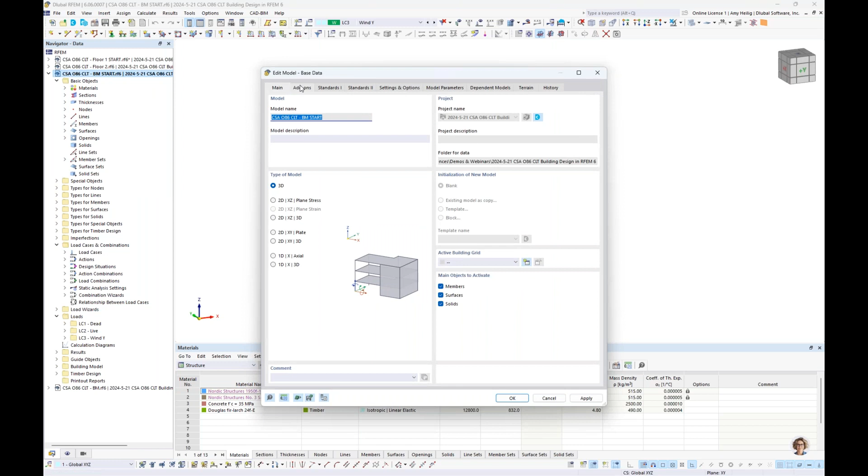I want to begin by activating our building model add-on, and this is just going to release building specific features within this general FEA modeling. So we'll go back to the base data here that we saw in our previous example, and you'll notice that the building model is something we can activate down here in the lower left corner. When we do so, at first glance, not much changes with our model specifically, but over in the navigator, we now get a new folder here called building model.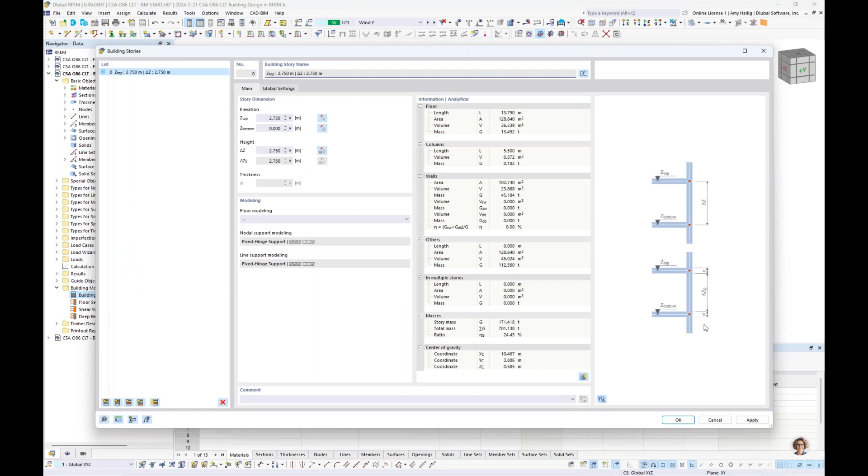And this allows me to specify the specific building stories. So I'll right click here to create a new building story. Now the program automatically suggests that I would like to create my first story at an elevation of 2.75 meters. So that's correct, we'll go ahead and leave that as is. But I'm going to continue defining the additional stories here the entire way up, so we have a total of 10 stories.

Now we see a nice view here showing which elements are attached to which specific stories. It's also shown in table format as well. For each one of these specific stories, we have the floor modeling options shown here within this dropdown.

So the first option is really no input at all. Essentially, we're going to use the true stiffness properties of the CLT timber floor for both in-plane and out-of-plane, so both gravity and lateral analysis.

Alternatively, if we decide that we meet the criteria to consider our CLT as a rigid diaphragm, we could also set that here within the building model, and that's what we're going to move forward with today. So this is going to consider infinite stiffness in the in-plane direction, but out of plane for those gravity loads, we're still going to use the stiffness properties of the CLT elements themselves.

The third option you'll notice is load transfer only. This is otherwise known as a flexible diaphragm. We will not have stiffness in the in-plane direction, nor do we have stiffness in the out-of-plane direction. Rather, these surfaces will now be used to distribute loads based on the tributary area to the objects that it essentially is attached to, so those vertical walls, for example.

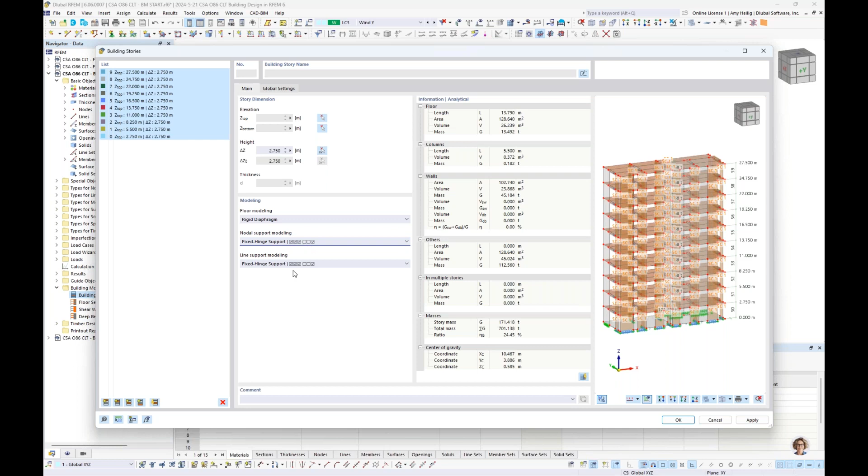Now for our rigid diaphragm today, we're just going to leave this more or less as fully fixed conditions that we see here for the relevant degrees of freedom. So once we have defined all of these stories as rigid diaphragms, we click OK.

And what we will initially notice if we zoom in here is the display of that diaphragm graphically. So the center of mass is displayed here, and that rigid diaphragm is going to connect every single FE mesh point at this floor rigidly in the in-plane direction.

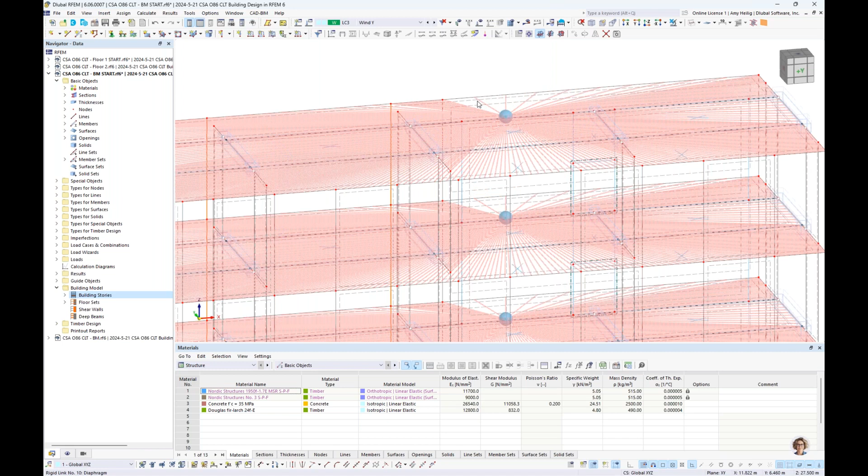And if we double click on our CLT panels that we're defining here for our timber floor, you'll notice that the stiffness type was now changed to a floor slab rigid diaphragm. Again, that's only in the in-plane direction. Out of plane, we're still going to use the true stiffness properties. If we really don't want to see this display of all of these rigid links, no problem.

Up at the top here under our navigator, under special objects, we can go ahead and deactivate them here.

The final thing to do before we rerun our calculation is to define our sets of shear walls. Under the building model folder we were previously under, you'll see the option for shear walls. We can right click to create a new shear wall definition, and I'll begin with my series of concrete shear walls on the left-hand side, selecting them one by one all the way up the height of the building.

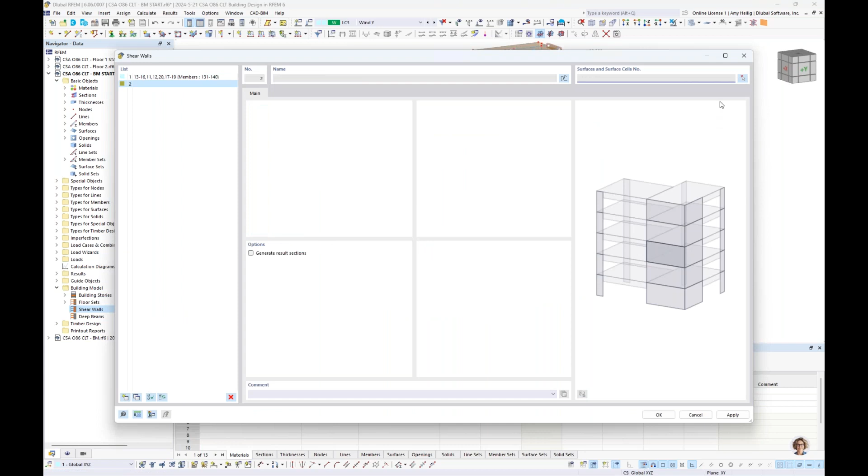We can also create a second set of shear walls, and these can be our CLT surfaces. We aren't restricted to any particular material - any CLT, concrete, whatever it may be, can be selected as a shear wall. What the building model will do is simply take these 2D surfaces and sum up the internal forces and present it to us as though it was a simple member, almost like a column spanning up through these shear walls.

This is going to be much more user-friendly when we're designing our shear wall, so that we can immediately see the total shear forces in this 2D surface, the total in-plane bending moments, and we'll see this in just a minute with our calculation.

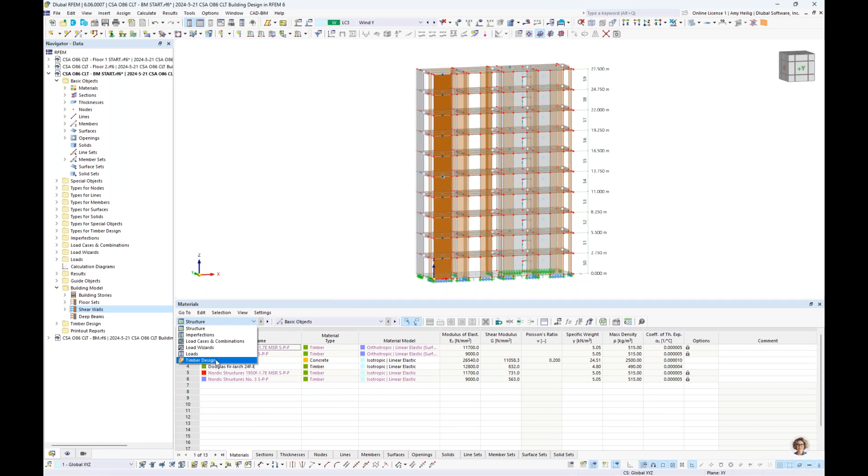Keep in mind that once we've defined our building model specific features, back under the timber design add-on, nothing is different here from what we saw in our first example. I'm not carrying out fire design for this example, but we have the ultimate and serviceability design situations. We can select here which elements we want to design. You'll notice I currently have the 3 surfaces for my timber floor, as well as a couple vertical walls that I'll fully take advantage of the CSA design equations for.

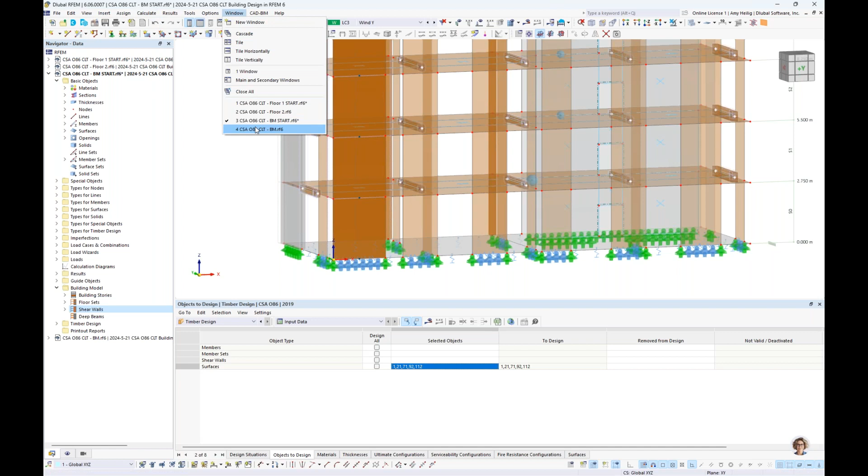So now that we have input the information, we would go to calculate all. Just for the sake of time, I will pull open an already saved model here where this calculation is now carried out. We'll begin with the analysis results.

I'll jump here to load combination 4, which includes dead, live, plus my wind load. My results are available to me here - I'm currently looking at the global deformations, but you'll notice that with the building model, we now have 3 different options to toggle to. The first is walls only, so we're not viewing the display of our diaphragms because these have rigid in-plane stiffness, but rather the global deformation of those vertical wall elements only.

Now, alternatively, I can toggle this to my floors. Remember, we're going to extract each individual floor into a separate submodel, and apply all of the additional loads - mainly those gravity loads will only impact the design of each individual floor element. So the global deformation in the vertical direction is shown here, but if I try to activate any deformation in the translational directions, we're not going to see any results, because these individual timber floors are supported with line and nodal supports, and in the translation direction we have infinite stiffness again.

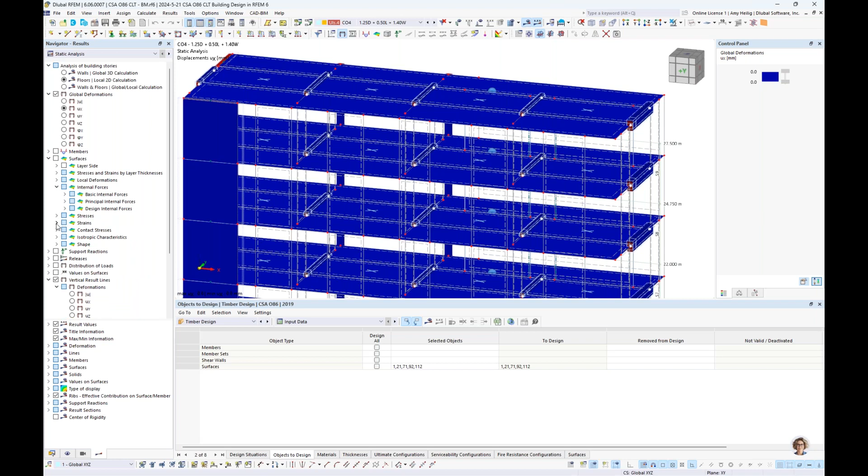If we take a look at the surface internal forces, we can activate, not necessarily the stresses, but maybe we want to look at the bending moments of our timber floor. So sure enough, we see bending moments mx, we see bending moments my, but the minute we activate nx or ny - those in-plane internal forces - we see the value of 0 here.

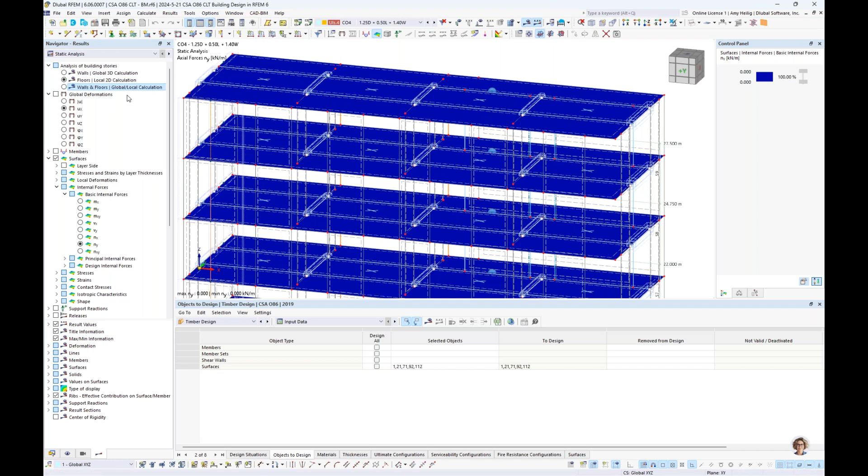The third option is just going to display the walls and floors together. So if we're interested in viewing the global deformations, maybe internal forces, the program will more or less display the results of those two separate calculations together.

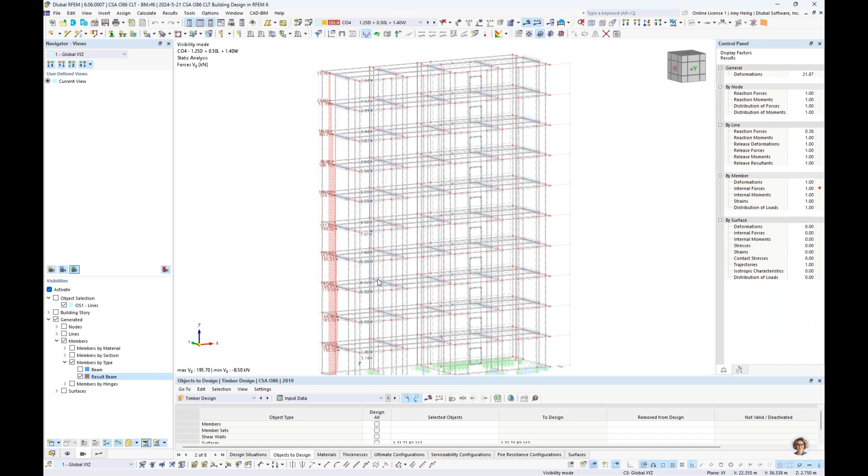Now, remember that we also carried out that shear wall calculation. By defining those individual shear walls, the program will display this to us as standard members. I'm going to turn off the global deformations and activate only the member forces. What else I'd like to display under my specific views is not necessarily all members, but members by type - let's turn on only the result beams. Within the result beams, these are my shear wall results, where the program sums up the internal forces for the entire width of each shear wall and presents this to us graphically as a result beam. We have this same information given to us in table format as well.

So if we take a look at the static analysis with the building model, we also have the ability here to view the results by stories. Here are the member forces in the shear wall.

In table format or graphically, we can sum up the shear forces and the in-plane bending moments. This is going to be much more user-friendly than trying to determine the total forces across this 2D surface element.

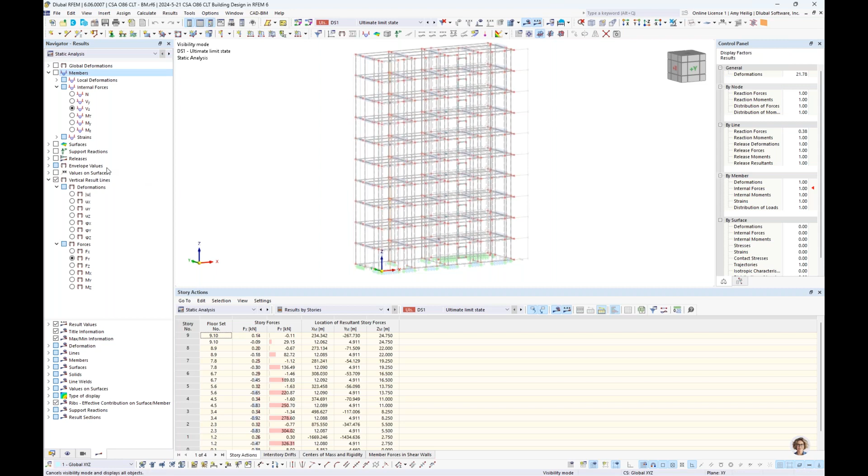We also can take a look at the additional tabs given to us by the building model, such as the story shear. I'll go ahead and turn off the display of my members here and cancel out this visibility mode. We want to take advantage of what we call the vertical result line.

This is going to show us, which we can see on the right-hand side for one of our load combinations, the total story shear graphically as we move up and down the structure. This is the same information given to us in table format as well.

We can also view the displacements of the structure, and as expected in the Y direction, we see higher displacement at the top of the structure versus the bottom. This is also given to us within table format as well as the inter-story drifts.

And finally, we see here the center of mass and center of rigidity. This information is shown in table format, but also we see the display of the center of mass as we click down through these different stories.

We can also turn on the center of rigidity, which is calculated with those rigid diaphragms and presented to us graphically and in table format, so we can see how this varies compared to the center of mass.

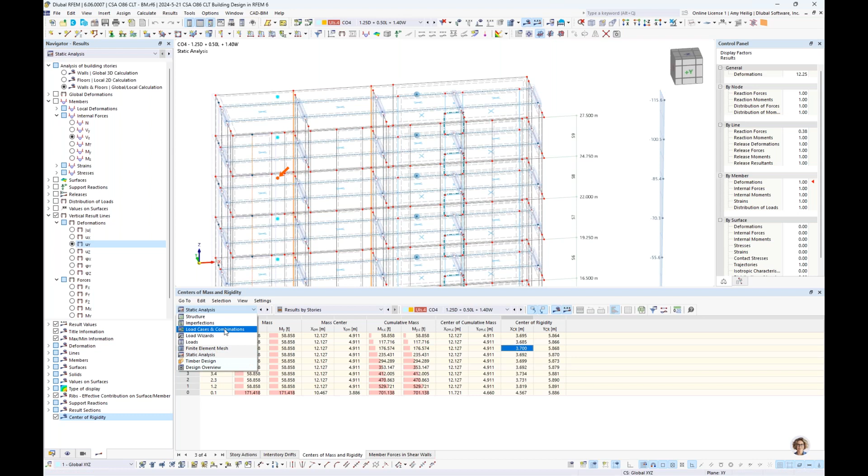No need to go into the details here because we are out of time, but under the timber design add-on, we are going to get the full design of these surfaces as well. Just like what we saw with example number 1, we're going to see the ultimate and serviceability design ratios according to the CSA standard for both the timber floors and our vertical timber walls.

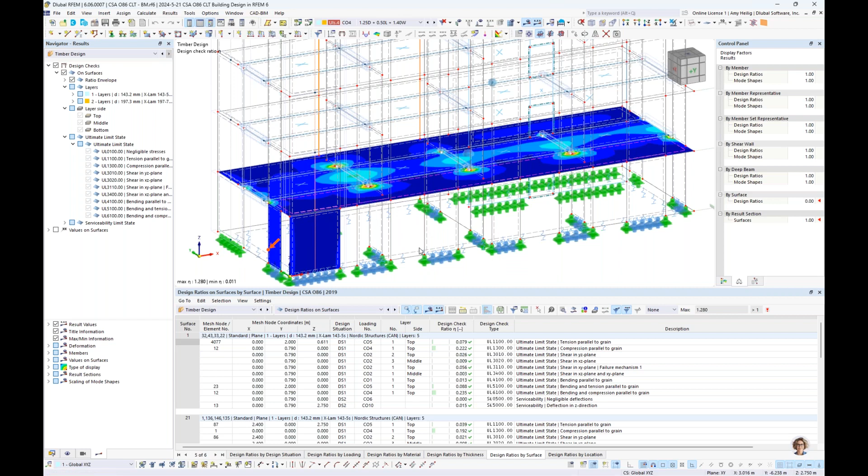Okay, so that will wrap up our second example today, where we have taken a look at both the gravity and the lateral analysis and design together for a multi-story mass timber structure.